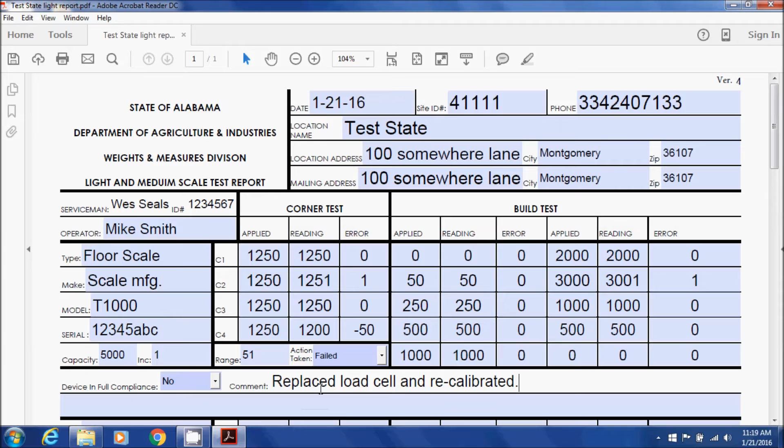Okay, we're going to say replace load cell and recalibrated. Alright.

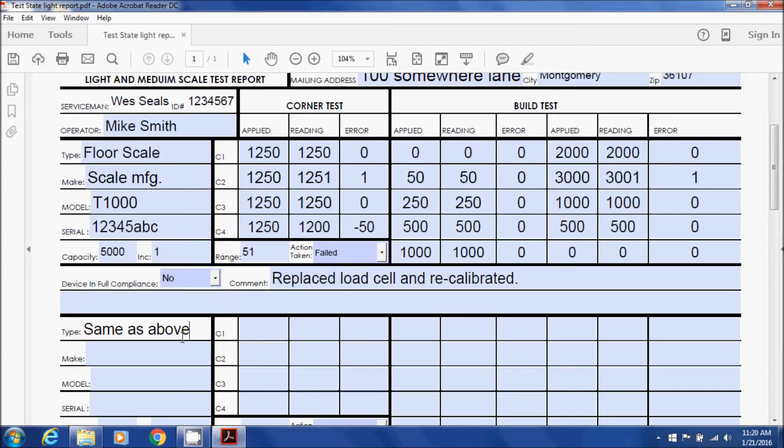Now, let's say you did that and now you have to show your as left. You can come in here and you can say same as above. Now, some locations, their ISO may want you to re-enter all that information in, which you can do if you want to, or if you just want to do a little simple same as above, or you can say as left, and then you just go in and retest your scale.

So we'll go in here and let's say you retested it. Okay, your range, there's no error, so you're good there.

But let's just say you had 1249 here, we're going to do you a -1 here, and let's say you had a 1251 here, and you had a +1 there. So now your range error would be 2 pounds.

Okay, now your next, of course, you want to start with your 0. You want to do 50, 250, 500, 1,000. And I'm just hitting the tab key, it's walking me through where I need to go.

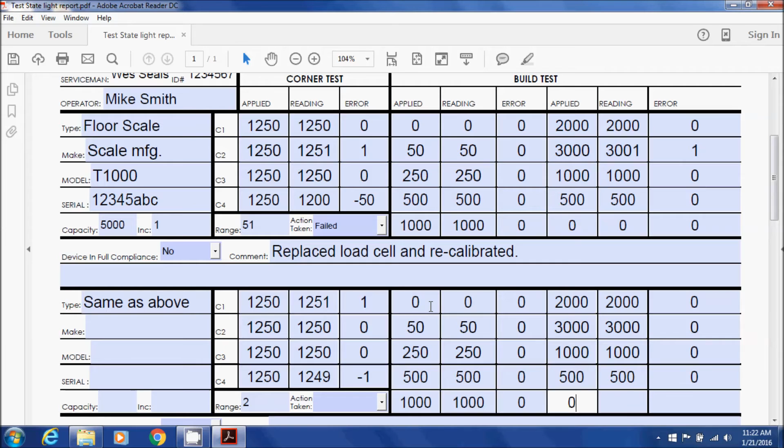Okay, let's do your decreasing load. And then, of course, you return to 0. All right.

Let's say this scale passed. Everything in it, all the other stuff meets all the state requirements and guidelines, federal, state. So now you just want to put in something like same as above.

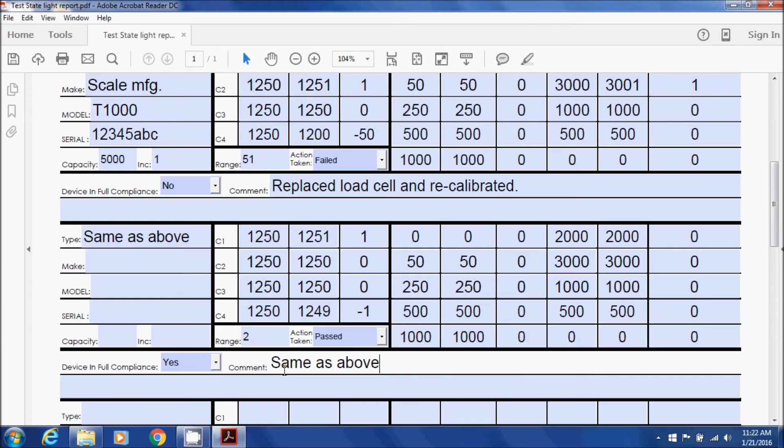It is required to have something in the comment section on each report. It won't let you upload unless you do have a comment in each section that you do a report on.

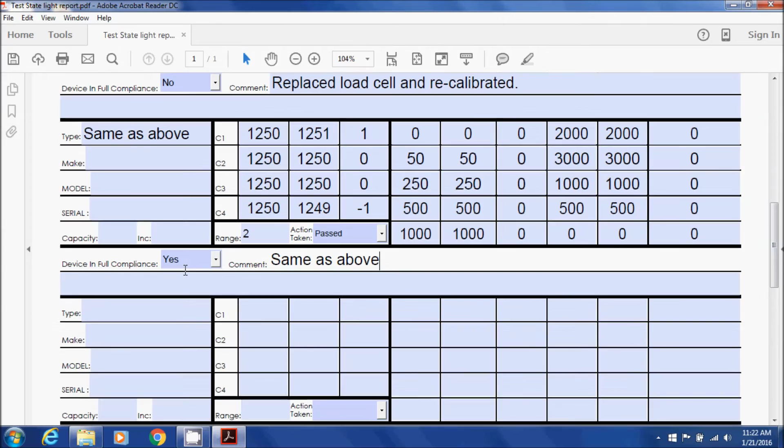All right, let's say the next scale he goes to is a bench scale, sort of like a grocery store scale. We'll say this is made by the same people, scale manufacturer. Instead of a T1000, we'll call it the J1000.

Make up a serial number here. Let's say this one is 30 pounds by 0.01.

Okay, so now you go back to your corner test, just same as above. You'll say 10 pounds in your corner test. Let's say it weighed 10.00.

10 pounds in the next corner. Let's say this weighed 10 point, let's say 10.01. You'll say 0.01, 10 pounds.

Let's say this corner was a little light. It was minus 0.01. So your range error is going to be 0.02.

Action taken, we're not there yet. So you'll want to start at your 0. Same thing applies here, start and end with your 0. And then you want to do your build test as per handbook 44.

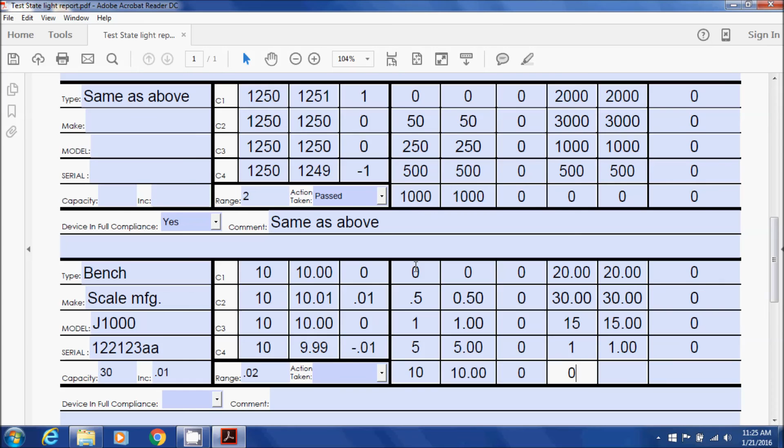Now you have to do your decreasing load test. We'll say 15. Oops, 15. 1 pound. And then your 0. Okay.

Action taken, it passed. Device in full compliance, we'll say yes. Comment, say scale - we'll just say scale passed inspection.

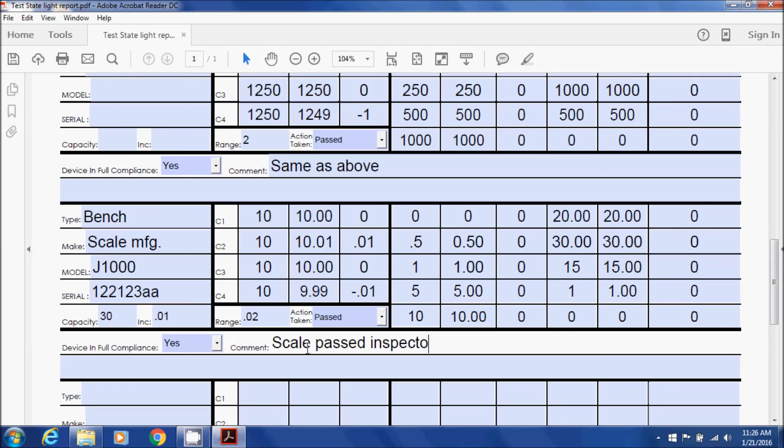Alright, there you go. Now that you've had everything filled out, there's a couple extra, if you had a lot more comments that you couldn't fit in here and you didn't want it to get small, because of course it auto adjusts. See, watch, it'll auto adjust. It doesn't automatically drop down.

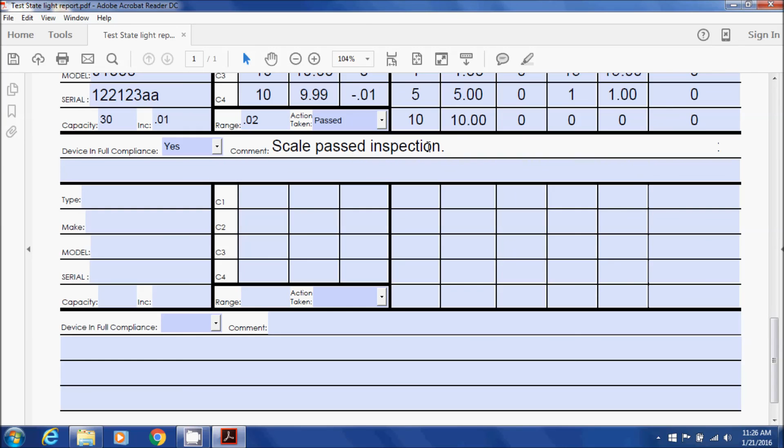But let's say you had a lot going on or some more notes that you need to post, maybe something about their device registration or anything like that. You've got a couple extra lines down here at the bottom that you can continue to write some more comments on.

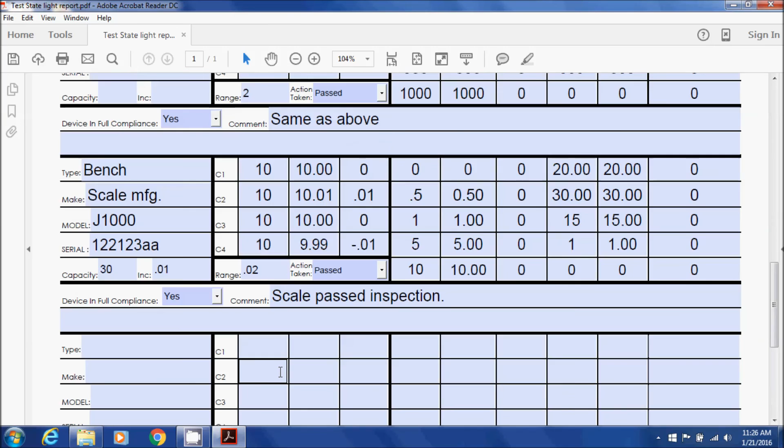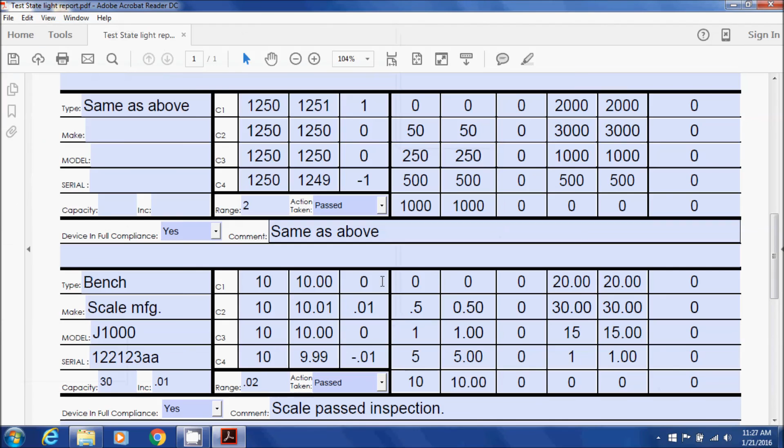Alright, now you'll want to save this. Make sure you save it. I'm just going to rename it the same thing. Tell it yes, and close it down.

Let's just go right back in there. Close this out so you can see it. And there it is, it's all filled out and saved.

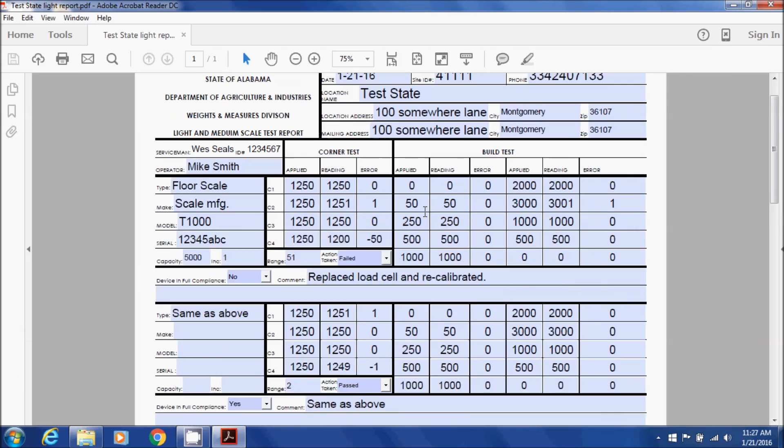Alright, that completes the filling out the report. In the next video, we'll show you how to upload it. Thank you for watching.